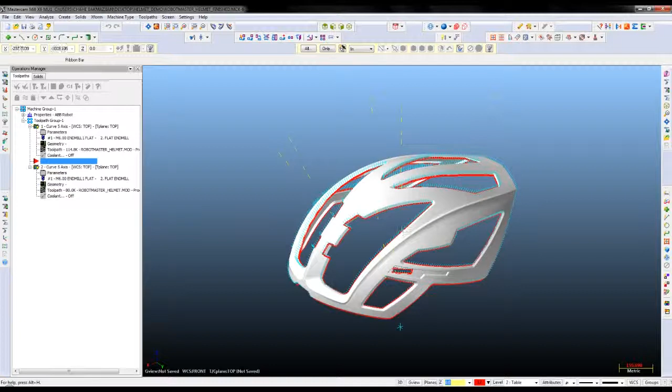Now I'm going to come into WCS, into View Manager here, click on front, and now set my WCS to front. If I go ahead and refresh my graphical screen, we see that the part has been reoriented.

So one of the first things I need to do is go into simulation settings and reselect the part so that it's refreshed in this new orientation.

Once that's done, I need to come into my operations, because these are operations that have already been done, and reselect WCS and set it to front. I'll do that for the first operation, and then come in and do it for the remaining.

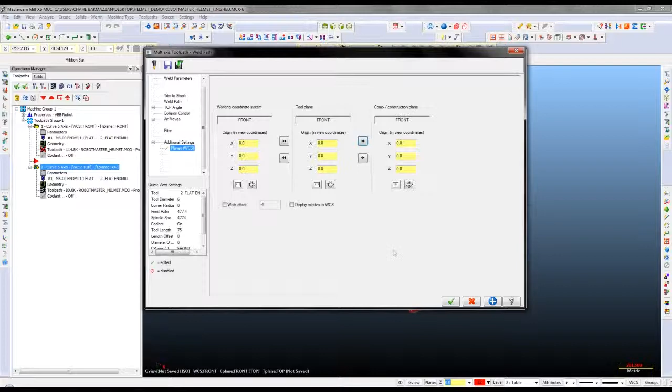So now we've set both operations to WCS front and reoriented the part. Now let's go ahead and simulate.

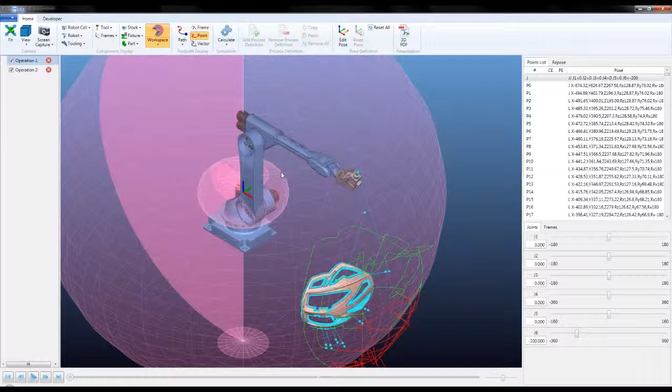In the simulation, we're going to see that now the part has been reoriented. It's been flipped 90 degrees to accommodate for the change in WCS. We also see here that both operations are out of reach because the orientation has changed.

If we enable the workspace analysis, we see that a lot of the transition moves are outside the robot's reach.

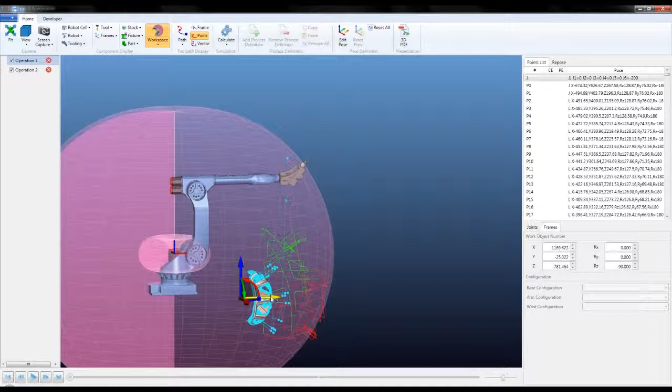So now I can just click on the part and bring it in a little bit, and click on calculate. We may have to move the part just a little higher. And now both operations are a go.

So this is just a brief example as to how we were able to reorient the part using WCS and then reprogram the part using any WCS.

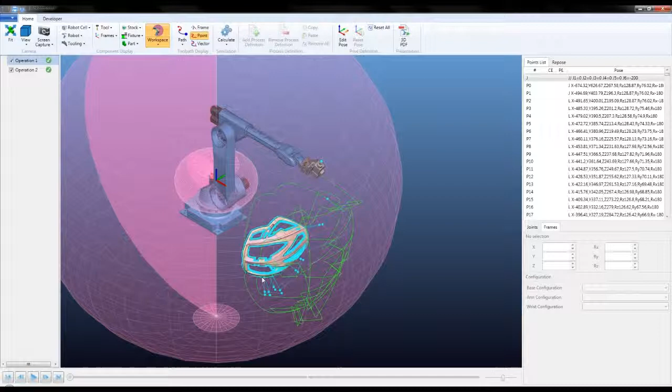Again, just to highlight the rules: only one WCS can be defined per Mastercam file, per MCX file, and all the operations need to reference the same WCS.